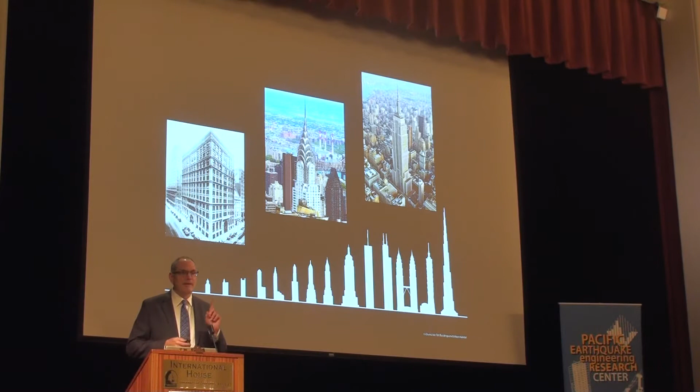In fact, I'm going to break an NDA right now, but I worked on a building last year that's 1 mile tall. 1 mile, not 1 kilometer, 1 mile tall. Whether it's built or not is another story, but we're clearly advancing our practice and reaching for the clouds, if you will.

But many of our methodologies that we continue to use today in the design office are rooted back in this day. The code framework, by and large, that we still practice with today around seismic engineering, wind engineering, fire engineering, everything that drives the performance of a structure is rooted in this day, even though our tools have advanced and maybe we think we're smarter because we have some experience. The framework in which we operate is still pretty rudimentary.

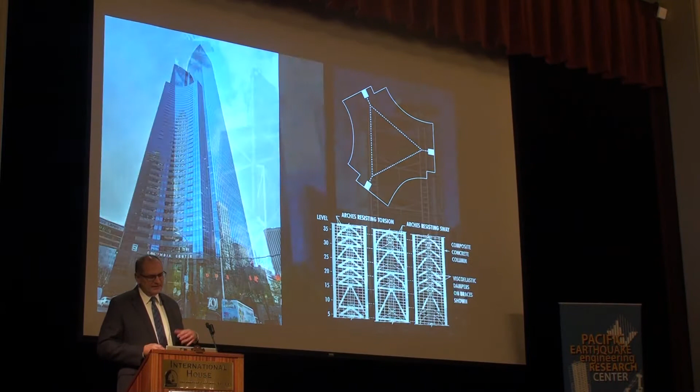Now then it was a necessity because the tools didn't exist, and so the structures that were conceived, designed, and built were fairly simple, and we were able to track load paths and understand behavior. We started to get a little bit more ambitious and started experimenting with tools and materials, advanced materials and composite construction, trying to organize the parts and pieces in a little bit more exotic fashion. But the fundamentals, the load paths, and how the building worked as a whole was still fairly basic. In fact, you could do the calculations by hand with no computer.

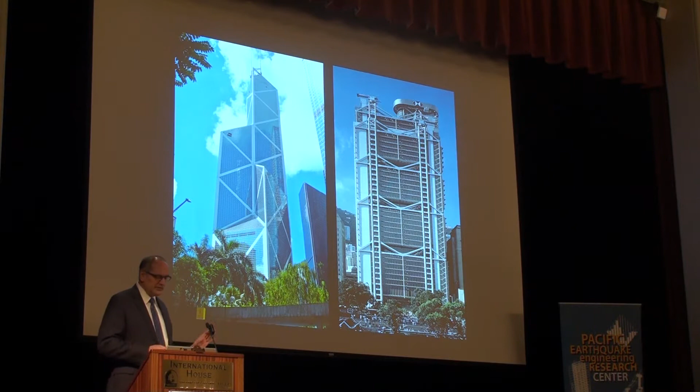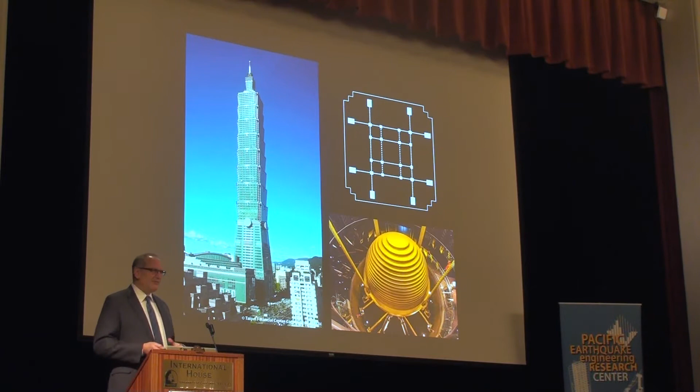We started to push further and further with exotic materials to the point where we needed to add other things like damping systems because the buildings were getting very flexible and we needed to supplement the strength and the stiffness of the building with some mechanical means. And so we're advancing, but yet we're still working in this framework that's actually pretty archaic. Even today, some of the buildings that we're designing and building are still in that framework.

Now, about 25 years ago, we started to embark upon this journey of performance-based seismic engineering for buildings. We stole from the renovation crowd. The performance-based framework had already been imagined for seismic retrofit and renovation, and we borrowed it and started applying it to new buildings. Some of the buildings in San Francisco that were designed in the mid-2000s, maybe 15 years ago, were the first to really capture that, but we've moved forward and extended that approach to taller and taller buildings.

Yet today our architects continue to challenge us with unique, very expressive architectural designs, or even wacky forms, where yes, we have a tool, a computer that will allow us to put things in and spit things out, but how confident are we really in what we're looking at?

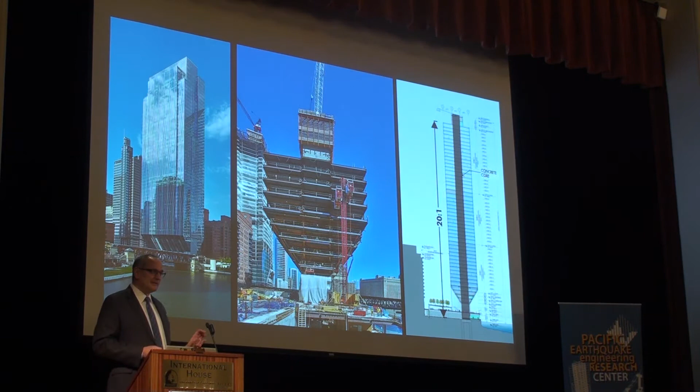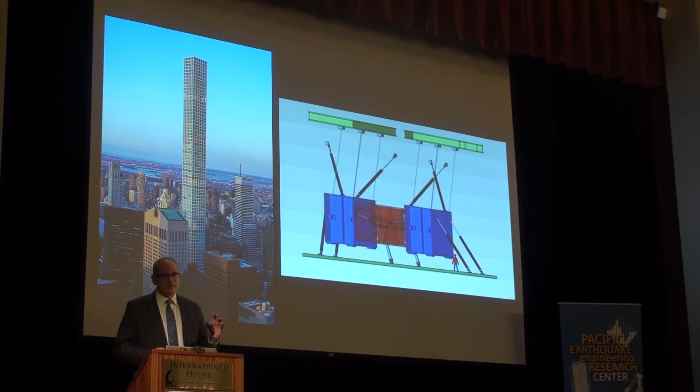And I think the rest of my presentation is going to tie very well with what Dr. Abrahamson was talking about with regard to the seismic hazard side of the equation, if you call it the demand side. I'm going to talk about the supply side now, where there's equal uncertainty, and how do we best manage that uncertainty. So we're designing very heroic buildings today, things that leap over railroad tracks in a single bound. Buildings that are so tall and so slender they couldn't really have been imagined a few years ago, using tricks, but still in the same basic framework.

So when we look in the crystal ball and we look forward, what kinds of things do I see in the near term and maybe a little bit further out? One thing for certain is that cash is king. In my business, the people who pay for the building stock, the owners, the developers, even the institutions who pay for the buildings, care about money. We all are here to talk about resiliency. So how do we change that?

And I'm reminded of the commercial for Kona beer. Maybe you've seen the Kona beer commercial. They coined the phrase FOMO, right? FOMO, fear of missing out. That's the resiliency conversation we have to have with our clients, that when the hazard occurs, the earthquake, the tsunami, the tornado, the thunderstorm, or what have you, that damages your building to the extent that you can't use it anymore, but your competition's still in business, that's the fear of missing out. That's the money. Because I can no longer make money because I'm on the sideline.

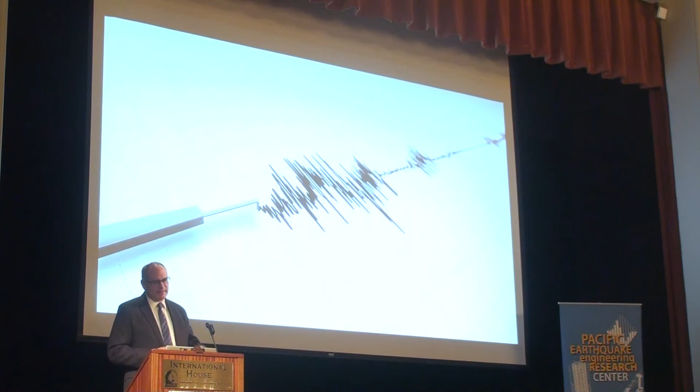So cash is king. It's not going to change no matter how much we want it to change. We have to change the dialogue to make people understand what's at risk. And this goes back to what Norm was talking about, the risk side and the risk evaluation. So putting it in the world of seismic engineering for a moment, performance-based seismic design has advanced a whole bunch in 25 years. I worked on my very first performance-based design building in 1995. Here we are, 2020, 25 years later, and we've learned a lot. And the practice has, I wouldn't say been perfected by any means, but we've learned a lot and we're better at it. We're more thoughtful in our modeling and our predictions.

The other thing I'll say about performance-based design is it's intended to get directly, through science and physics, a best estimate of performance of the building. Where we've gone in 25 years is from kind of an open palette of thought and dialogue and science and math to a very prescriptive methodology. It's almost gone too far, where today the performance-based design of many buildings is nothing more than an enhanced prescriptive design. And I think we've got to be careful about getting in our own way in that regard.

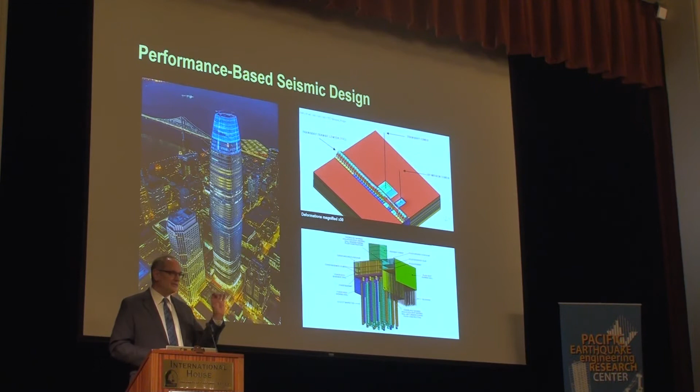Now, the number one thing I think that we can do to improve the building stock as it relates to resiliency, community resiliency, individual building resiliency, is the demise of R. The one-size-fits-all simplified approach to seismic engineering served its purpose in its time, but that's all it was. It was a tool to simplify a very complicated situation, and if there's uncertainty on the supply side of the equation, it's all in R, because structural engineers apply R blindly to all kinds of systems that aren't really reflective of what's underlying the science.

So I'm a little bit on a soapbox here, but the reality of it is our code today has a reliability framework as its basis. This is in chapter 1 of ASCE 7, the reliability table. If we're able to get at that from the supply side directly through science and math, including consideration of the uncertainty, we will improve the building stock an order of magnitude beyond where we're at. So this marries up completely with what Norm was saying on the demand side. We need to marry the supply side.

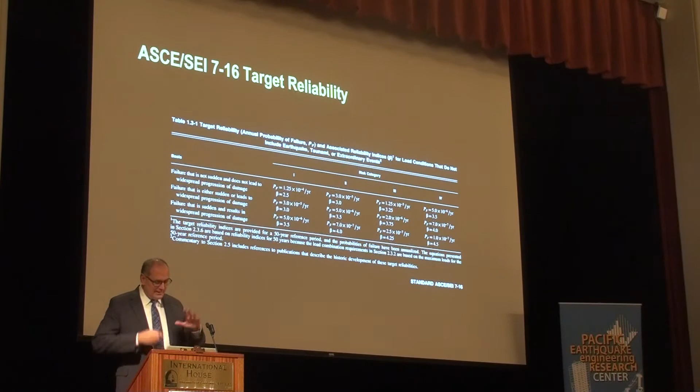Oh, right. God, Ron, that's hard. Yes, it's hard. We're dealing with people's lives, though, right? And people's livelihood and their safety. Let's not take it and make it easy. Oh, it's going to cost a lot of money. Yes, it's going to cost a lot of money. Let's raise our fees. Let's get paid to do proper work, to provide proper safety and resiliency for our communities. All right, soapbox. We've got some very ambitious projects going on in our office, in other offices.

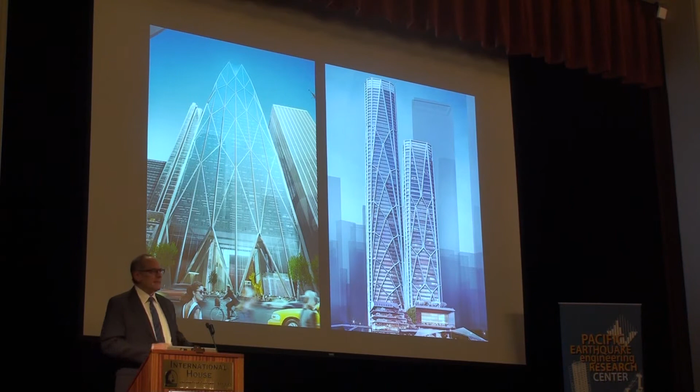We need that sort of framework and approach going forward to realize these more exotic designs in a thoughtful and a reliable way. Turning from seismic engineering for a moment, but I'll loop it back: wind engineering. Today, in my practice, in the practice of tall buildings around the world, this is the great new frontier. What do I mean by that?

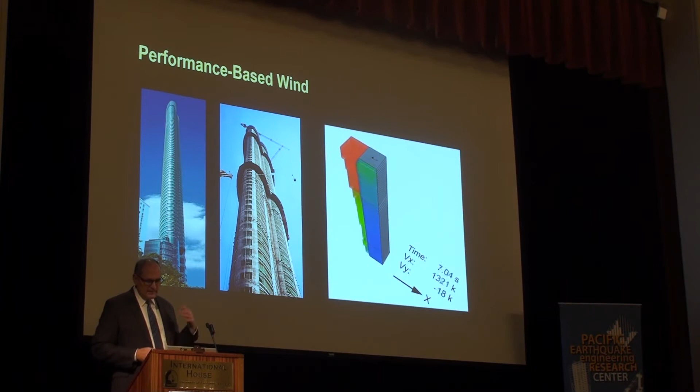We have these tools to allow us to interrogate tall buildings and their response to wind. In fact, last year ASCE published a guideline on performance-based design for wind. Why is that even an issue or relevant? So here's two buildings, Salesforce Tower you're familiar with, and One Brickell City Center in Miami. They're both 1,000 feet tall, similar in size, not quite in shape, but in mass.

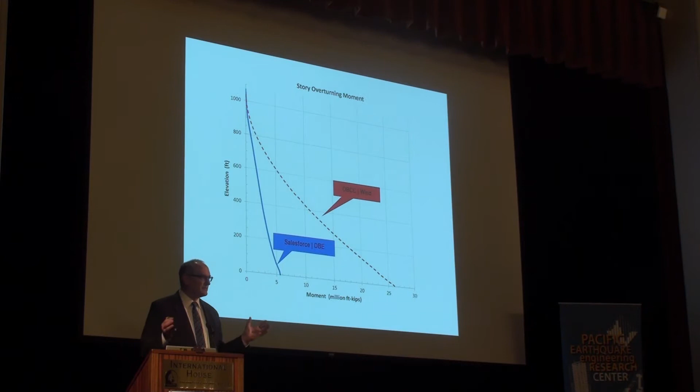Today, these are the demands on those buildings. The blue line is the risk category 3 overturning moment for Salesforce Tower. The red line is the risk category 3 wind demand for that building in Miami. Wildly incongruent. The building in Miami must remain elastic in our current code environment under those demand levels. It is 5 times stronger than Salesforce Tower. To me, that's absurd. In terms of sustainability, we could build 5 Salesforce Towers with the same amount of material we're going to put into this building in Miami.

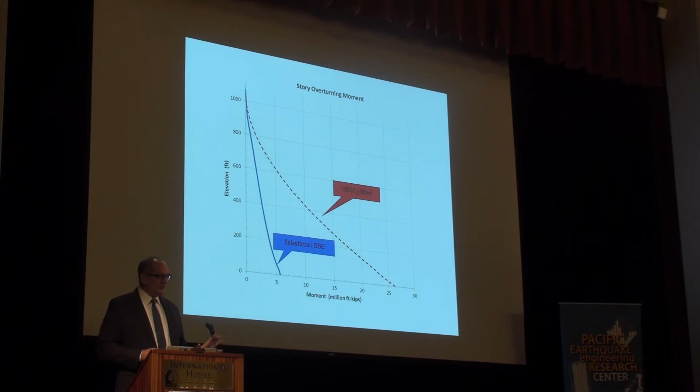Is that sustainable? If only we allow some modest nonlinear response, not crazy nonlinear response, in these tall buildings, absorb some of that energy, we can take some of the air out of the balloon. Closer to home in Seattle, this building's 900 feet tall. A little bit more complicated graph. The dashed line is the predicted MCE overturning demand on the building. The orange line is the wind demand on that building. The green line is the code risk category 3 DBE overturning moment.

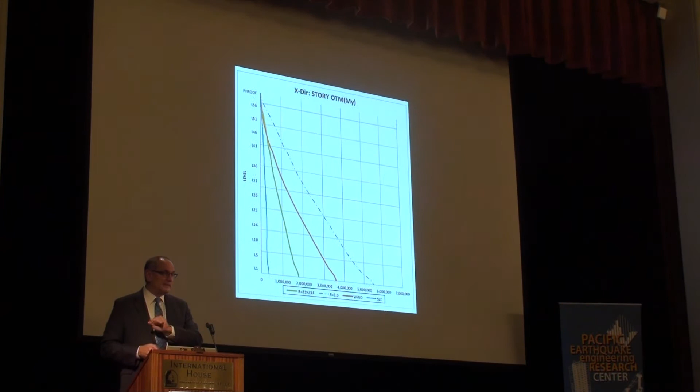You see here we have an effective R in this building of about 1.5. It's driven by wind. Why is that important? It flies straight in the face of our notion in seismic engineering of wanting to absorb and dissipate energy through nonlinear behavior. We needed to make the building twice as strong, due to the wind demands needing to be responded to elastically, than we would have otherwise if we were only considering seismic effects. These need to be brought together, and that's what that ASCE document is attempting to do. So a big area of new practice for structural engineers is looking at the nonlinear response of buildings subjected to wind load.

All right, let's move to materials for a moment. Lots of people hear about heavy timber design these days. It's kind of all the rage. It's presented in many ways, from sustainability to the aesthetic of it. There are some very important questions with regard to seismic engineering that are unanswered. And I'm very fearful in the engineering community that we're blindly proceeding, designing these buildings with an inappropriate approach. I'll give you an example.

The diaphragm design for these buildings many times is a nailed plywood diaphragm. And if the floor is 100 feet by 200 feet, the way engineers are approaching it today, the diaphragm design is viewed much as if it was a slab on metal deck in terms of the strength calculation. Nobody's talking about the deformation of a nailed plywood diaphragm that's 200 feet long. And I fear things like the garage in the Northridge earthquake. These questions need to be answered through research, through numerical modeling, through some pairing of that, and they're not even being questioned at the moment. We're just blindly doing these things.

Another topic is we're basically harvesting the forest and using the wood that we're given. And we know from our designs that the elastic modulus is what controls the design of these heavy timber buildings. Why aren't we growing forests with a better modulus? Sounds a little funny, but we genetically engineer all kinds of crops. Why aren't we growing proper trees to build proper buildings? Our buildings would be much better. It's an interesting question for some dialogue between the engineering community and the genetic engineering community.

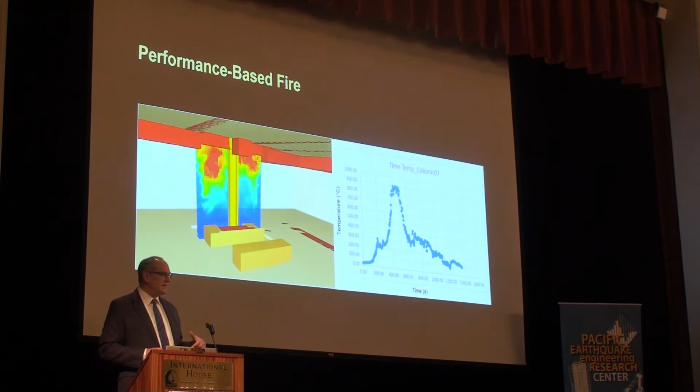Another area where structural engineering and fire engineering and seismic engineering can come together here is in fire engineering, performance-based structural fire engineering. To date, fire engineering is very prescriptive. It's really about 100 years old in terms of what's in the building code. We do have the capabilities to test and model thermal heat transfer. We know and can model the heating and cooling cycles of buildings. But at the moment, structural engineers mostly today give it the stiff arm because it's not been in our body of work, in our practice.

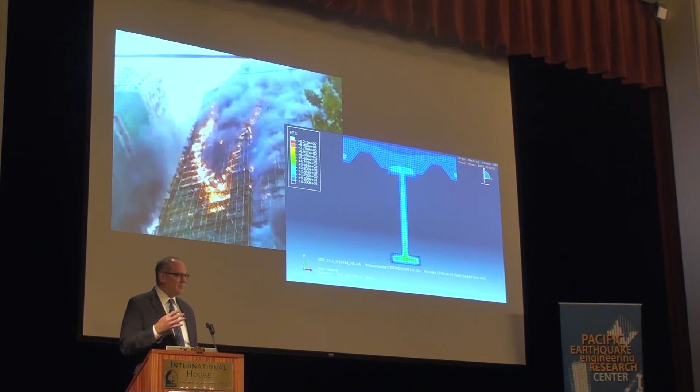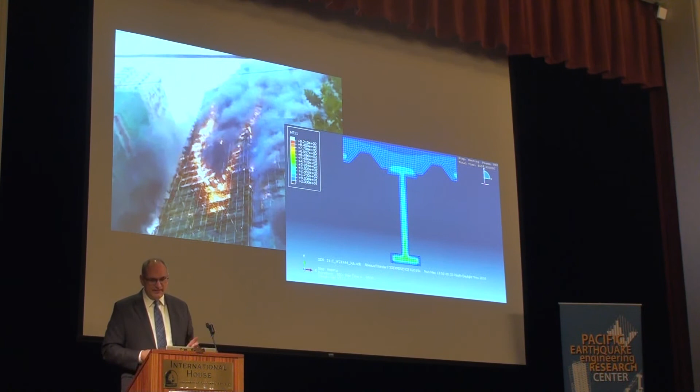In my view, it's just another load case. Yeah, it's a complex load case, but why don't we consider it another load case? And if we do, one of the implications of that is if we strengthen the end connections a little, or if we change the framing slightly, we can do two things. We can have a better fire performance in our building, and we can have better seismic or wind response because the overall system integrity is better. There's more resiliency in the building as a whole, and we've satisfied seismic and or wind and or fire as a collective. So that's an area of improvement coming forward that we're working on now as well.

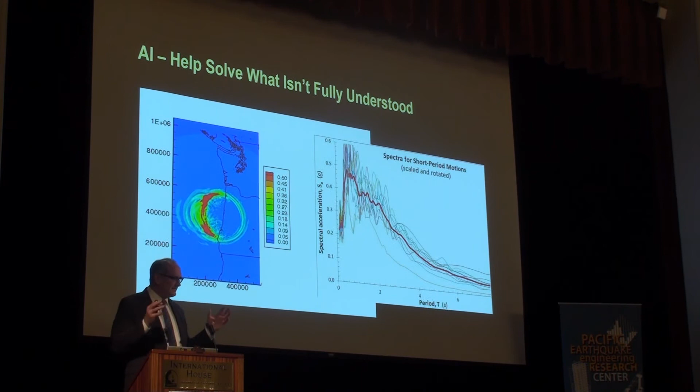Some of the work that's going on in artificial intelligence to mine huge data sets and to do more predictive work on giant data sets. Again, Norm talked about big sets of data that are growing ever larger every day. Our ability to understand that data and then mine it and use it somehow to predict future events is certainly something we see people working on, but it's going to gain some velocity.

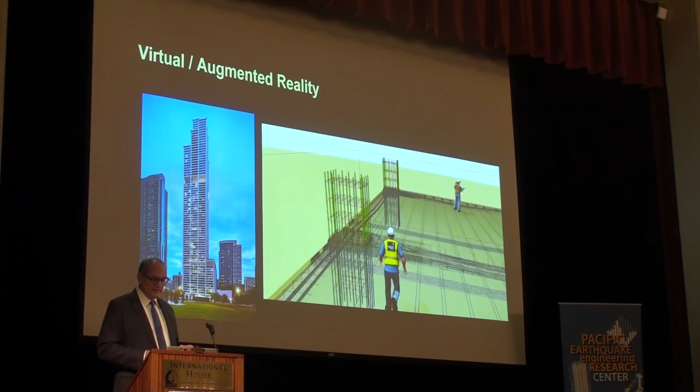Virtual reality we're already using. It allows us to actually enter our buildings before they're ever built and look at various conditions, walk around the floor plate before the contractor actually has to build it. This is very useful when we deal with complicated geometries. And then when the contractor says something we don't like, we can run.

One of the biggest things we hear in the construction community is the shortage of skilled labor. So robotics in the field is coming. Seems a little bit pie in the sky here, but it's not so far away that due to the labor shortage, there'll be a lot more robotics in the field in order to build our buildings, and that'll influence the componentry of how we actually make the buildings.

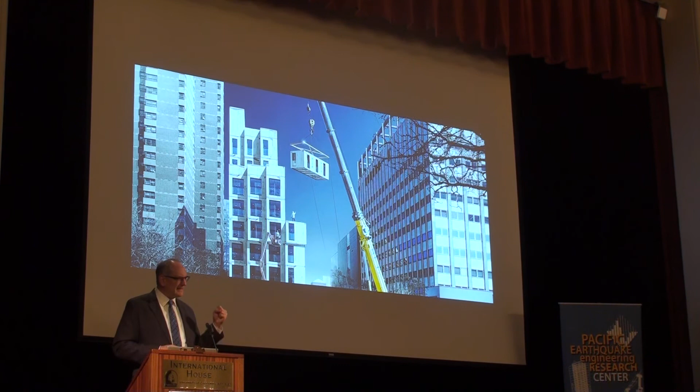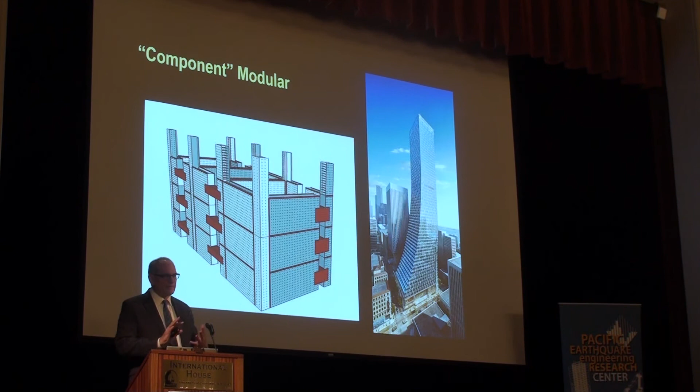Modular construction you've heard about and seen, it's not really caught on. People have been talking about it for 40 years, and it's really not anywhere. It's starting to get some traction to go from, instead of this large scale modularity, to more componentry modularity, where you can more easily fabricate and ship the pieces and then put them together readily in the field. And then maybe lastly, research.

What I mean and what I want to highlight here is a stronger and more robust connection between the practicing community and the research community. In my career, it's been pretty disjointed, and I've worked really hard on my side to connect that. I think as the practicing engineering profession, if we as a group of engineers came to the research community with more questions and more demands, we want this, please make it so, tell us how, we would be better off.

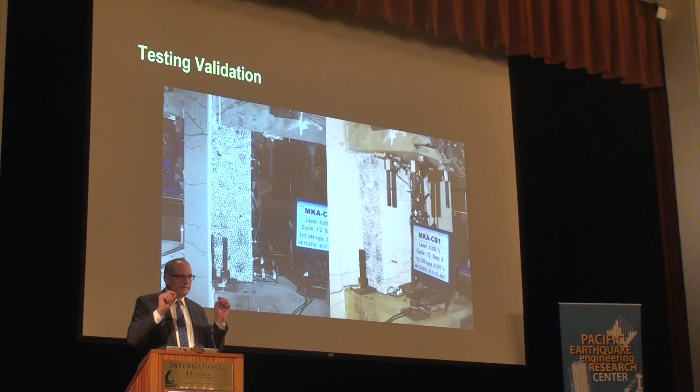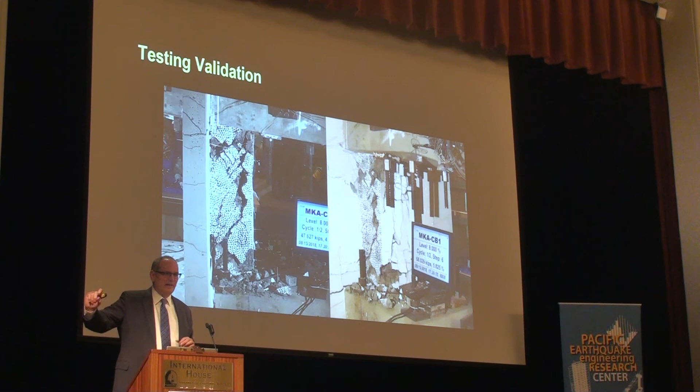There's a big, huge gap in research on modest yield cycles, meaning strain demands that are 1.5, 2 times yield strain with hundreds or even thousands of cycles. So we're somewhere between the seismic load protocol and the bridge loading protocol, where you're looking at tens of thousands of cycles at a fraction of yield. We need to close the gap in order to inform the wind engineering.